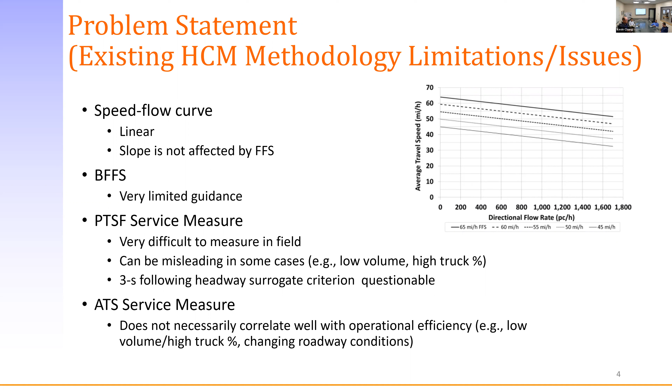The percent time spent following service measure is very difficult to measure in the field and can be misleading in some cases, depending on the combination of volumes and truck percentages. The 3-second following headway criterion was certainly debatable, so we wanted to revisit that topic as well. There's also an average travel speed service measure that didn't always correlate well with operational efficiency, again depending on the combination of volumes and truck percentages.

Truck impacts. One thing to look at here is this figure. Those familiar with the Highway Capacity Manual are familiar with the concept of passenger car equivalents - essentially that's how we deal with trucks, converting them to some equivalent number of passenger cars. What that's doing is inflating our analysis flow rate, and we just have this single speed flow relationship, so that pushes you further out to the right.

The challenge with 2-lane highways is you get more variability in geometry, horizontal curves, vertical curves. Just pushing you further out to the right does not necessarily reflect the speed degradation you'd have for these large trucks and consequently passenger cars that queue up behind them. There were other challenges because the PCE calculation depended on the service measure you were using, and there was an iterative component to it. So it was difficult to work with, and again didn't always reflect the actual speed reduction you'd have on 2-lane highways.

There were some issues with the passing lane calculations overestimating how much they improved performance on the 2-lane highway. There was a percent no passing zone input that was a little awkward because it didn't account for how that percentage was spread out along a certain length of highway - whether 50% is the first half, or broken up into several segments.

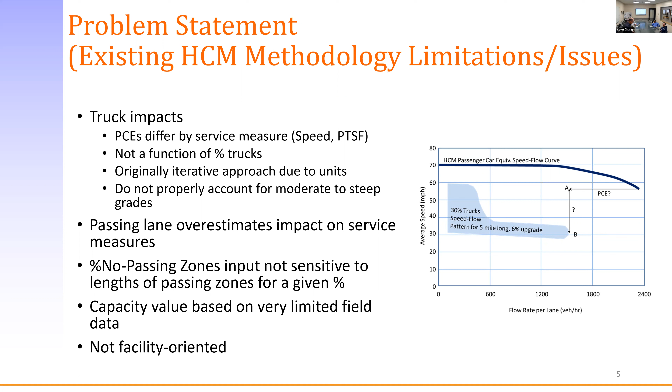In terms of ease of use, there were some things that were undesirable for users. We had 3 different classifications and different service measures being used depending on that classification. If you were looking at a class 1 facility, you had to go through calculations for both the travel speed service measure and the percent time spent following. Those of us who've taught this in the classroom - this drove students nuts. You get 2 different analysis flow rates, and why do I have to have 2 different flow rates?

So this was always awkward. It's one thing if you're using the software, but if you're teaching this, which you should be at least initially to the students, it was very awkward. And then there were several lookup tables with factors, some 2-way interpolations, some 3-way interpolations. It's amazing - as much calculus as our students take, I think the 3-way linear interpolation tables they found more challenging than calculus.

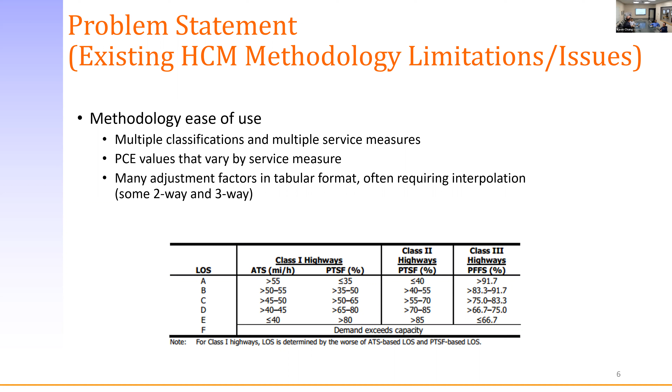So the objective of this research was to revisit performance measures, potentially revise the service measure - that is the performance measure we're using for level of service - and potentially overhaul the complete analysis methodology. Also to look at newer modern simulation tools that could help us with the research and potentially check some of the things that come out of it, and ultimately develop a new chapter for the HCM, which has been done, and I'll touch upon that a bit later too.

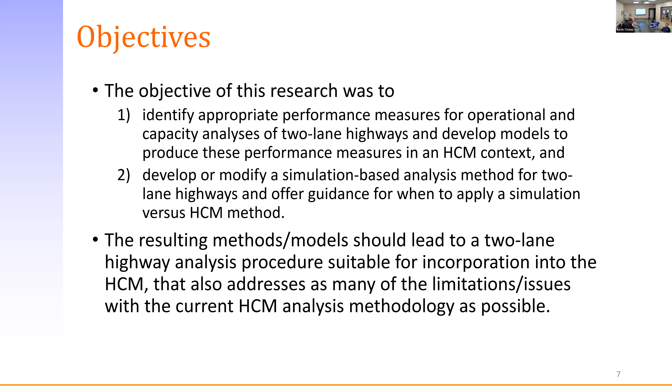Just to touch briefly on this, we had some field data, and some state DOTs that were very generous and helped us, because anybody who's worked on these NCHRP projects knows that even though there's several hundred thousand dollars of budget, they're always underfunded, so you're always looking for help in some form. We had state DOTs contribute field data - Oregon, Montana, so we had good presence from the Pacific Northwest, Idaho, North Carolina out east, and California. We had one site particularly selected because it had very high flow rates - we were trying to look at potential capacity level flow rates with that site.

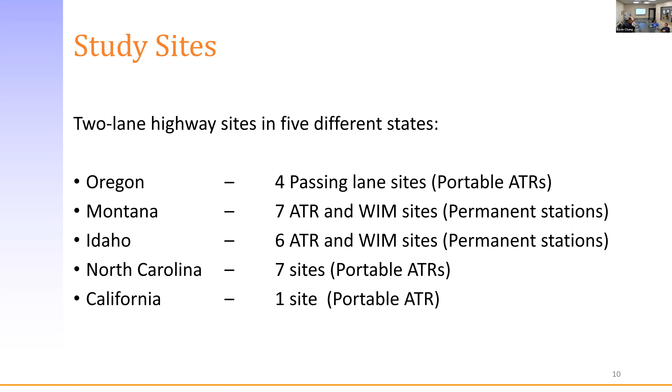And these were the locations. We'll just kind of skip through that.

Had a large volume of data, and to help us with that, we worked on a software tool to process the data to help us identify speed flow relationships, vehicle speed distributions, and any number of different things we were looking at. If anybody's interested in a software tool, they can contact me. Basically, it reads in different formats for point detection, whether it's loop detectors or pneumatic tubes or something like that. And we can always adjust it if you have a particular format. Anyway, this was very helpful in making our data processing and analysis more efficient.

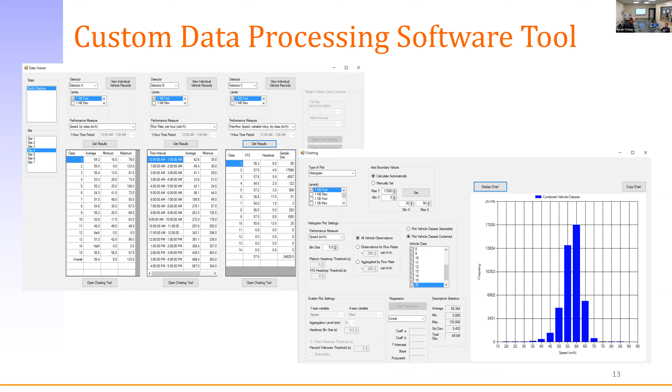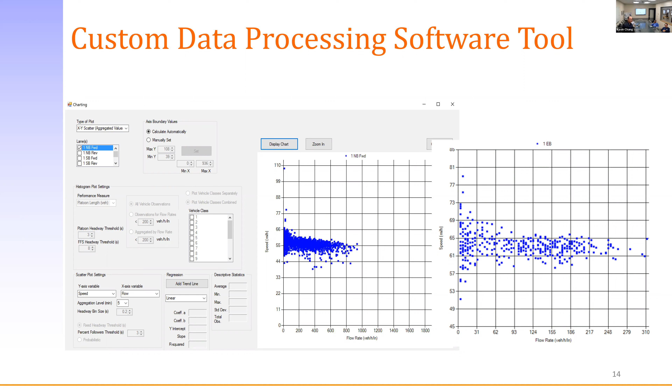Just briefly talk about simulation. Again, there really wasn't much available for two-lane highway simulation. I had worked on a project where we implemented this into CORSIM, a simulation tool some of you may be familiar with. That carried over into another simulation tool that I started developing about 10 or 11 years ago, because I was running into some limitations with CORSIM due to an older software architecture. So I decided to write my own. I took all that two-lane highway simulation logic from CORSIM and implemented it into what I'm currently calling SwashSim, and also made some upgrades at the same time.

So we use that tool for all the things - we did get a lot of field data, but unfortunately there's so much variety with the different scenarios we wanted to look at for two-lane highways, you just can't get it all without maybe a multi-million-dollar budget for field data. So we had to supplement that with simulation. We did do calibration with the tool using the field data we collected, and we relied on this largely for the simulation.

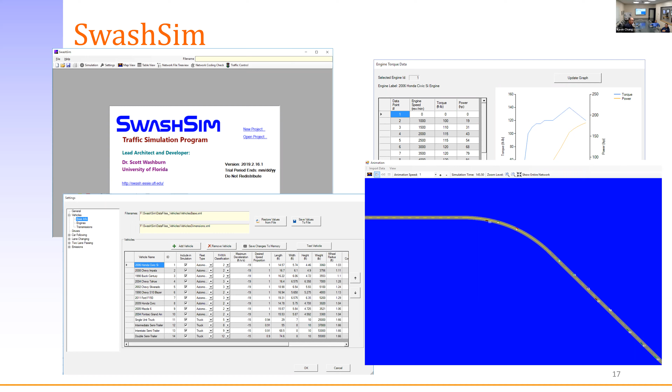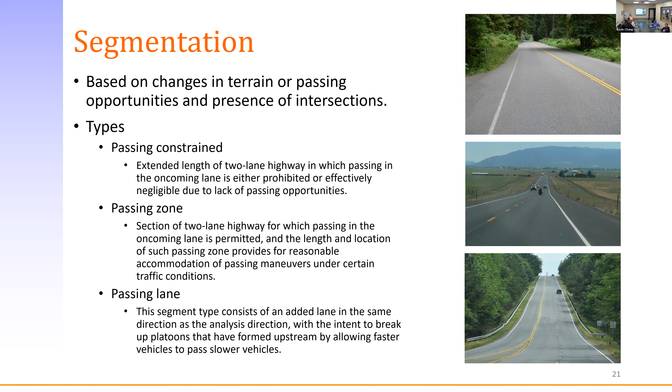So let me give you an overview of the analysis methodologies, the concepts behind the analysis methodology. We have three different segment types now. We've got the passing constrained segment, where you've got solid yellow lines, you can't pass in the oncoming lane, just a two-lane cross section. Passing zone, where you've got the dashed yellow line and you can pass in the oncoming lane. Or a passing lane, just a short section of additional lane to accommodate breaking up platoons due to slow moving vehicles. So we no longer have the percent no-passing zones input, because you would set this up explicitly as this segment has passing or does not have passing and so on. It explicitly accounts for the length of passing zones, and you can now string together a series of contiguous segments and essentially make a facility level analysis.

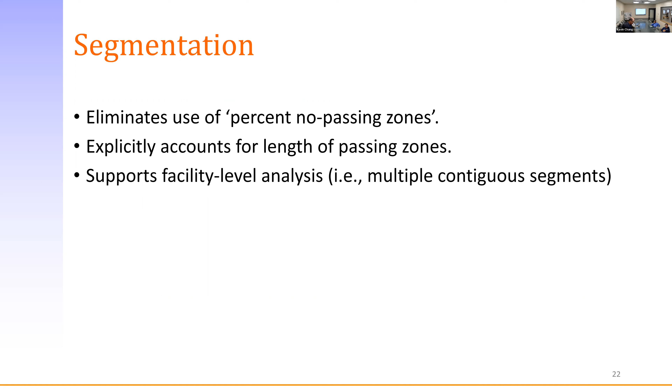Treatment of trucks - this is an area where we're deviating a little bit from the Highway Capacity Manual, at least historically. We had quite a bit of discussion within the committee, but we got buy-in from the committee. We don't use the PCE - there's no passenger car equivalent concept here. It's explicitly using percentage of trucks. What we did was look at three different classes of trucks: the single unit truck, the class 8, and the class 9. The class 8 and 9 are essentially tractor trailers, whether it's a day cab or a long haul cab.

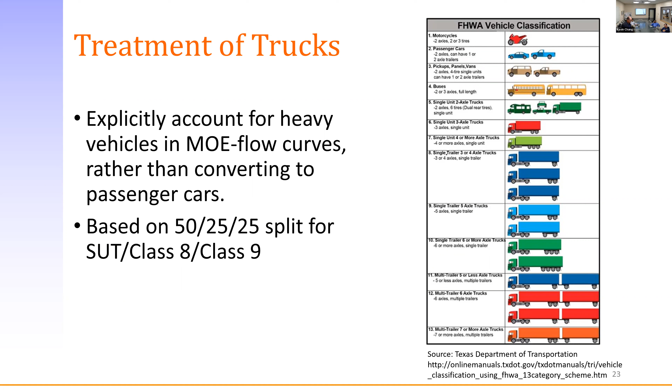And for terrain, we now have five different classifications. So depending on the length of the grade and the percentage of the grade, upgrade or downgrade, you would classify it as 1 through 5. So 1 essentially has not much impact to truck speeds. 5 is very significant - they're probably going to be at crawl speed going up grades, or crawl speed potentially going down grades because they're trying to avoid the runaway truck phenomenon.

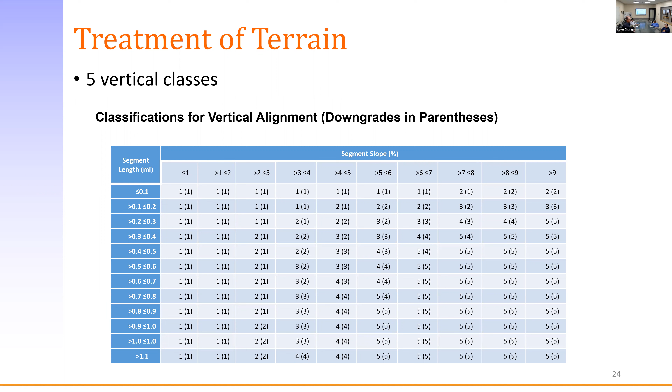And we're also accommodating some horizontal curvature, which we did not have as part of the previous analysis methodology. So again, there's 5 different classifications for horizontal terrain based on the radius of curvature and the super elevation.

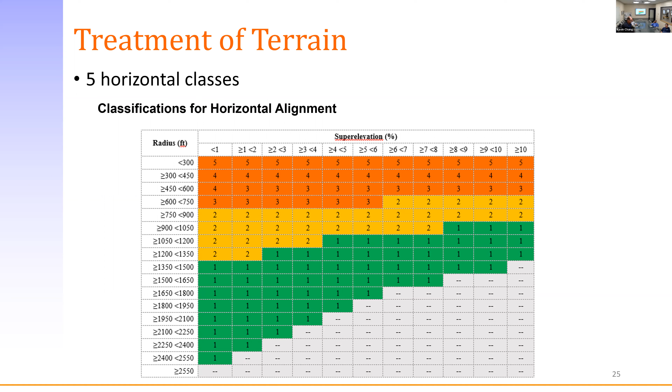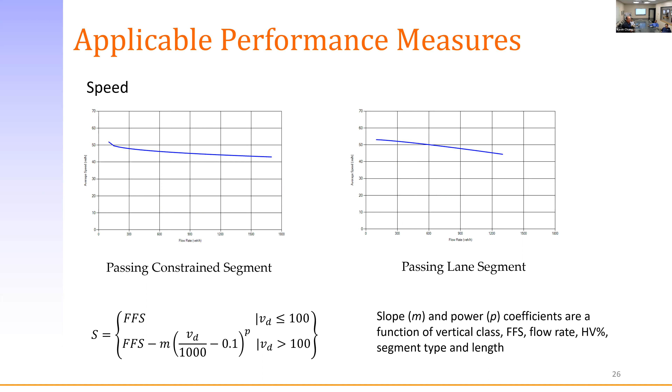There's a lot more background. That additional process we went through is not reflected in the chapter in the HCM, but if you're interested, you can get the original research report, which talks about the different things we looked at in trying to identify the follower status. But in the end, we went with this 2.5 second headway, which gets us in the ballpark most of the time.

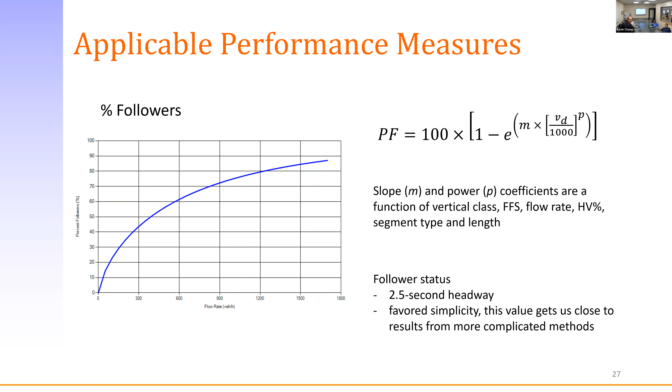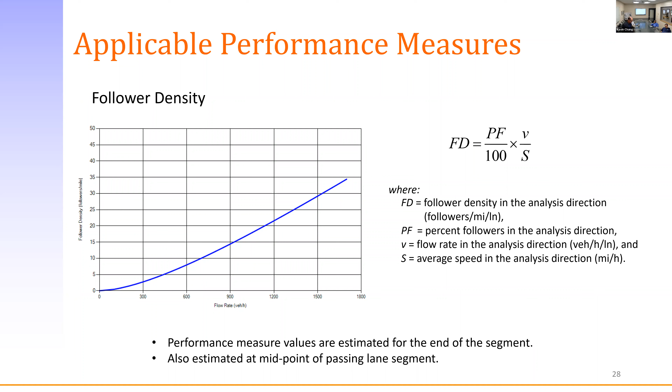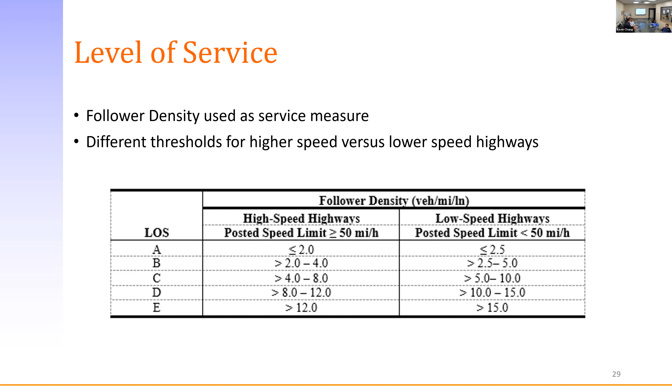Capacity: we did have difficulty finding sites with high flow rates, and this has always been a challenge. Agencies have a tendency to upgrade to a multi-lane cross section when the volume to capacity ratio is still not that high, just because people perceive conditions to be quite poor even at moderate levels of demand to capacity. So it's hard to find a 2-lane highway still out there operating with very high flow rates. We had a couple sites, one in California and one in North Carolina, and they were in the same ballpark as what the HCM currently has, 1700 to 1800 passenger cars per hour. We did not have enough additional evidence to change that, so we left it as is.

We did look at passing lanes. This was largely a simulation exercise, and you can have a reduction in capacity, at least via simulation. In conversations with some folks in Europe, where these 2+1 installations are common, when you have a passing lane that drops back down to a single lane under high flow rates, you can get quite a bit of turbulence at that merge point, which can lead to a reduction in capacity. We were hearing from folks in Europe that sometimes they have these giant festivals, and where they have the 2+1 or passing lane, they'll actually close the additional lane because they found that becomes more problematic under high flow rates. So we do have some reductions depending on the percentage of heavy vehicles and the vertical classification to capacity for passing lane configuration.

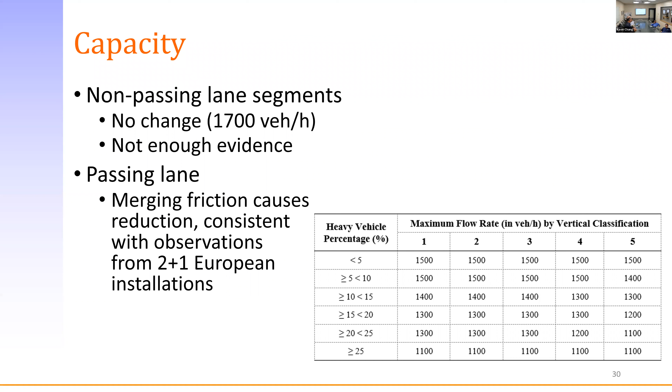So real quickly, the steps that you go through. Actually, I think I'm going to skip through this, so if you're interested later, you can slow down the video and look at it. But again, these are all outlined in the HCM chapter as well. As we have with every HCM methodology, we outline the sequence of steps you go through to do the analysis.

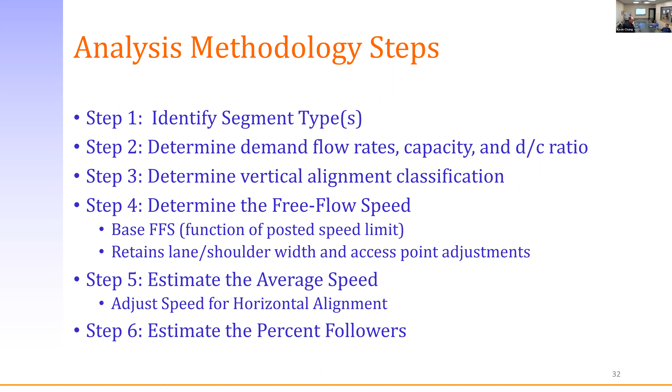And this was what I was mentioning before, the 2+1. So this is a continuous 3-lane cross section where you just get an alternation of the passing lanes. The passing lane is always on the inside in the middle, and it just continuously changes direction. So you typically have like a 2-kilometer length of passing lane, and then you have a little clearance zone, so you try and avoid accidents in between. And in these installations, you do not allow passing the oncoming lane.

This type of configuration agencies really started to turn to because of safety issues of passing the oncoming lane. So sometimes they are barrier separated, sometimes they're not. We found different countries felt differently about that. Like barriers generally aren't friendly to vehicles, but particularly motorcyclists. So some countries were more sensitive to that than others.

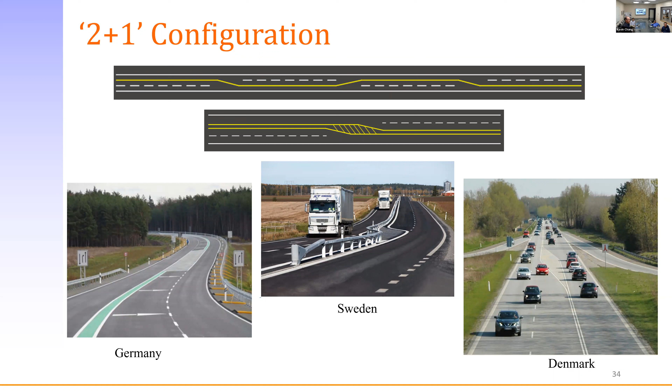We've never had anything before in the HCM about these 2+1 configurations. So it's not comprehensive yet, but we have a small section about 2+1. US transportation agencies are kind of interested in exploring this, and it gives them a starting point. There's a couple of calculations in there to look at how that type of configuration may improve performance over a typical 2-lane cross section.

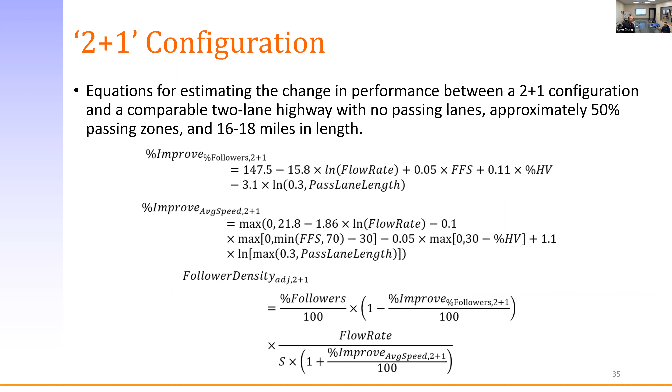So real quickly, a summary of this. We did offer a little bit more guidance on base free flow speed. It's simply now a function of the posted speed limit. Unfortunately, with all the field sites we had, I think they were all posted 55, or maybe all but one. In the future, we'd like to get more data from sites with more variety in the posted speed limit. So right now, the base free flow speed is just 14% higher than that posted speed limit. But again, when we did the data analysis, it was originally all relative to just 55 miles an hour. We feel that the new speed flow relationship is more realistic with the current field data that we saw.

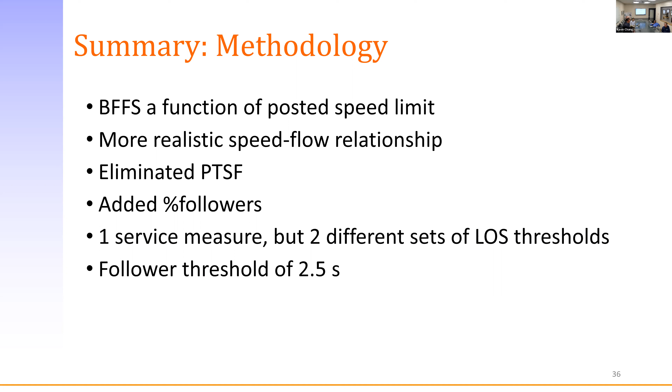We eliminated the percent time spent following measure and added a percent followers measure. Now we just have a single service measure, but there's 2 different sets of LOS thresholds, and the follower threshold, which previously was 3 seconds, is now 2.5. Again, no PCEs, everything's done in units of vehicles per hour, so there's no conversion to passenger cars per hour.

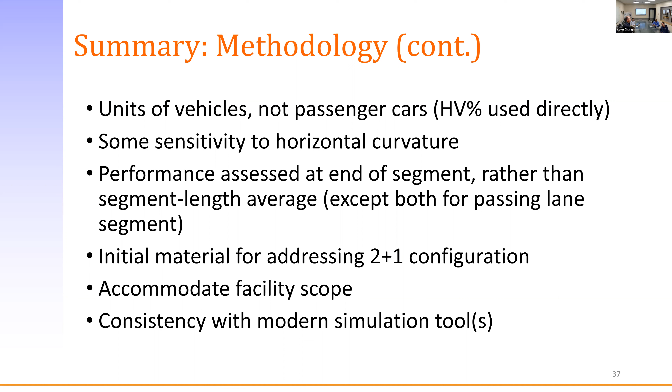There's some sensitivity now to horizontal curvature. Another thing is, with the previous methodology, essentially those calculations were on a link basis or segment basis. Now, those calculations are specific to the endpoint of the segment. So if an agency wanted to check the calculation from the HCM, they could go out in the field, if they have loop detectors, great, or put down some pneumatic tubes, get some point measures and compare that to the estimates from this methodology. Again, we've got some initial material for the 2+1 configuration. We can accommodate the facility level analysis, and these results are consistent now with what we're seeing from modern simulation tools.

On the ease of use, this was something we were trying to consider in this project, just to make this methodology a little bit easier to use. There are no tables that require interpolation. There are quite a few lookup tables, but those are specific usually to, say, vertical class. Once you've identified is it 1, 2, 3, 4, or 5, you just get all your coefficients for the equations from that table - there's no interpolation involved. Again, not having to deal with converting from vehicles per hour to passenger cars per hour, single service measure, no percent no-passing zones input, and eliminating the PTSF measure, which is very difficult, if not impossible, to measure in the field.

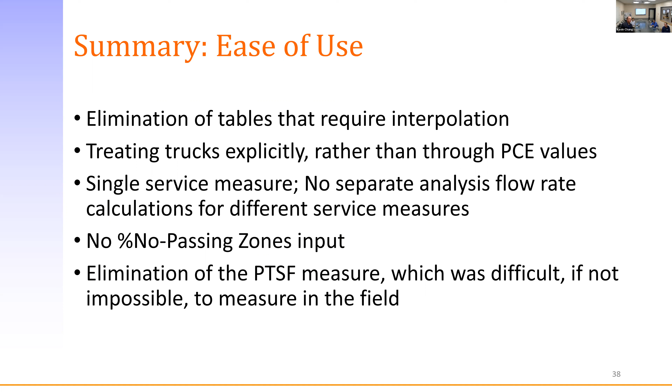Again, there's SwashSim, there's Transmodeler, which should give you pretty good results - we think realistic results matching what you would observe in the field for simulation. And I think now there's some other tools, the VISSIMs, the Aimsuns, and so on. I noticed that the paper I did with a student about implementing the 2-lane highway simulation modeling into CORSIM has become extremely popular in the last couple of years. So I think it may be some of these other simulation tool vendors that are looking at that, and I suspect there's some similarity now in how 2-lane highways are simulated in those tools with how they are in SwashSim.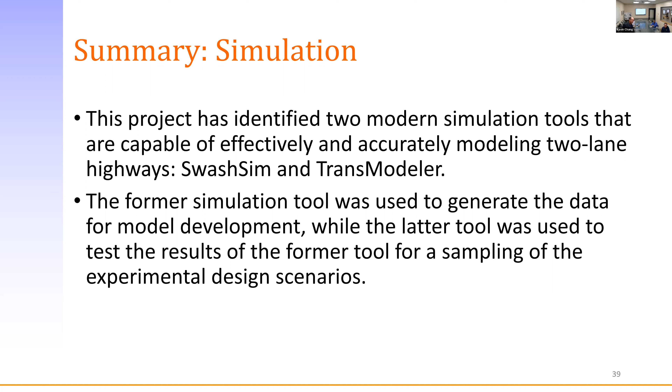So the chapter was formally adopted by the Highway Capacity and Quality of Service Committee at the January 2019 meeting in Washington, D.C., the TRB meeting. Then an electronic version of the chapter was released on hcmvolume4.org, basically a year later. And now it's included in the print, although I'm not entirely sure if the print edition has hit the streets.

But there is an electronic version now of the HCM 7th edition, which was released earlier this year, so you can get the new analysis methodology. I'm not actually sure if the pre-release version is still on the HCM Volume 4. It might be, but certainly you can get the full official final release version now in the 7th edition of the HCM.

And that analysis methodology is included in software that I make available freely called HCM Calc. More information about it is on this GitHub site. So if you want to experiment with that, send me an email and I'll send you the software.

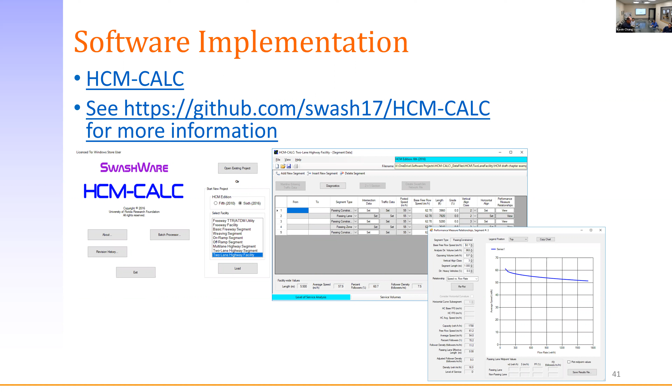All right, so let me just give you a little bit of an overview now of the current project we have going on, this NCHRP 08-135, called Reliability and Quality of Service Evaluation Methods for Rural Highways.

And this is our research team here. Again, I'm the principal investigator. Dr. Al-Kaisy from Montana State University is on the team. And then we have Kittelson Associates, Bastian Schroeder is leading that part of it, and Anna Moreno, who's with Technical University of Munich in a postdoctoral research position.

This project is now taking what we've done before and trying to take it to the next level. The previous project was focused exclusively on 2-lane highways. Now what we're trying to do is expand that to highways, but a little more specifically rural highways. In the HCM, we've got a facility methodology for freeways, arterials, and two-lane highways now, but we don't have a way to connect multi-lane highways to two-lane highways to the occasional intersection, signalized, roundabout, or stop control. So this project is trying to develop that rural highway facility methodology.

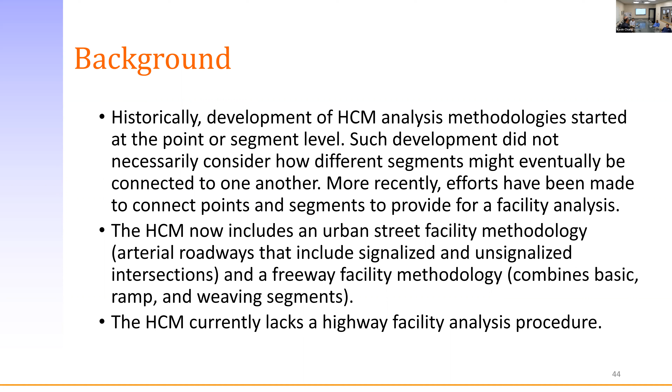The challenge, let me see, I might have that on a future slide, so let me come back to the reliability component in just a moment. But yeah, there are some different challenges here with rural highways versus freeways versus arterial streets. One, much longer distances we're usually looking at, more variability in the geometry, horizontal and vertical alignment, and some variability in these different cross sections. Whereas there's quite a bit of similarity in a freeway facility from one segment to the next—it's really more, does it have an on-ramp, does it have an off-ramp. And even with arterials, there's quite a bit of consistency in the cross section along the length of the arterial.

The rural highways often serve quite a significant percentage of recreational traffic, particularly on weekends. They even serve some bicycle traffic.

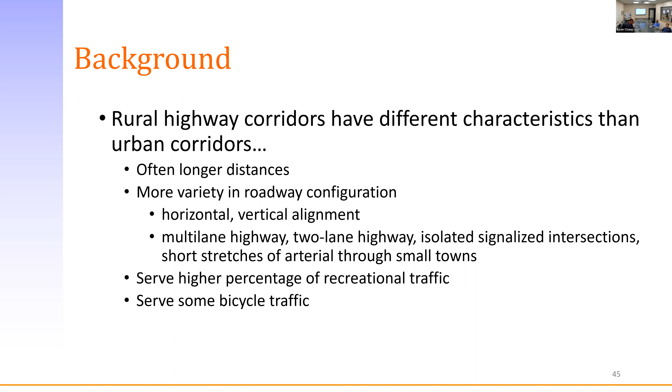So the objectives of this project: develop guidance for segmenting a facility. Again, how do we identify this is multi-lane, this is two-lane, this is an intersection, and so on, but a little bit more than that, I'll touch on in a second. Develop a level of service methodology for automobiles. Develop a reliability analysis methodology for automobiles. Develop a guidebook for the users, and identify research and analysis needs for the bicycle mode on rural highways.

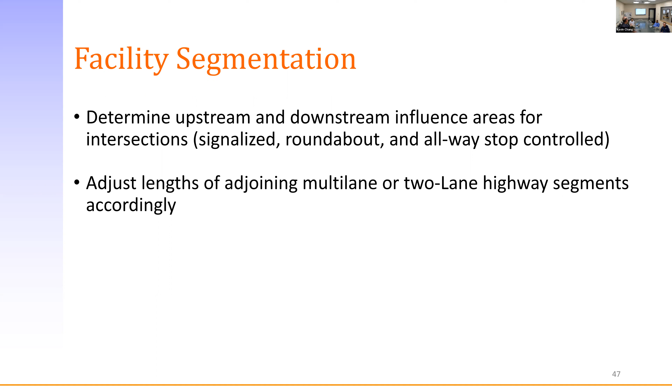So the segmentation, some of it is probably pretty straightforward—we're going from 4 lanes to 2 lanes, okay, got a multi-lane, we've got a 2-lane. It gets a little bit more complicated where you have intersections, because intersections are often just considered as points, but they're not just points. They certainly have an effect on operations a little bit upstream, a little bit downstream. So we're trying to identify what are those influence areas, and how signal timing and the traffic characteristics and so on affect how much influence that intersection has upstream and downstream. And then you would adjust the lengths of those adjoining segments accordingly.

The guidance on when you analyze, say, a stretch of arterial roadway with the urban street analysis methodology in the HCM is somewhat generalized. We're looking to try and make that a little bit more comprehensive—when would you use that urban streets methodology versus, say, just using an isolated signalized intersection analysis methodology combined with an upstream 2-lane segment or multi-lane segment downstream? And with that, we're trying to look at a number of factors: signal coordination might play into that, possibly demand volumes, driveway presence, roadside activity like parallel parking, things like that. So we're just trying to develop a little more comprehensive guidance, because we have heard from agencies that they would like better guidance on when they should be using the urban streets methodology.

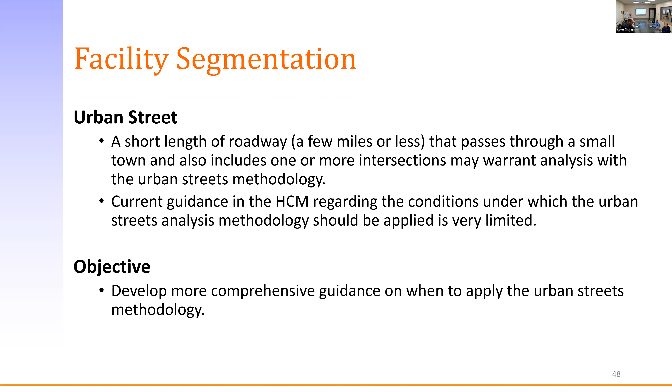And that, again, would be applicable when you're going through rural highways, you go through these small towns and might get a series of intersections that would operate more like an arterial street.

So when we think about freeways, the service measure is density, whether it's a basic segment, an on-ramp, off-ramp segment, or weaving segment—it's the same service measure throughout. Likewise, with an arterial, delay is the service measure.

Here, it's a little more complicated. For 2-lane highways, we're using follower density. Multi-lane highways use density. Intersections use delay. So how do we come up with an overall facility level of service methodology with somewhat disparate service measures? That's something we're needing to figure out.

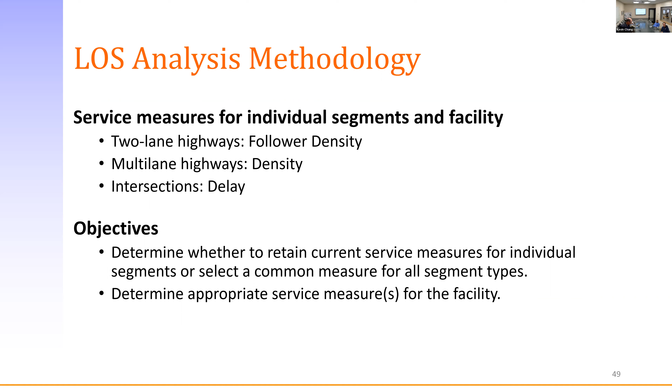On the reliability aspect, there's been a lot of back and forth on this with the panel. The way it's been treated in the HCM is we want to look at usually a year-long duration of traffic demands and weather events and incident events, possibly even construction zone information, and develop a distribution ultimately of travel time. These kinds of data are a little harder to come by for rural facilities right now.

Usually the demand volume data collection points are much more sparse than an urban freeway situation. Weather data collection may also be more sparse in these rural areas. For incident data collection, there are traffic management centers to track incidents on urban corridors, but they don't see rural incidents directly—people call in and report it, but a lot of incidents on rural routes go unreported.

So we're probably not going to end up with something that looks like the travel time reliability analysis methodology we have right now for freeways and arterials.

What we're trying to do right now is look at how we can use existing probe vehicle data, such as INRIX data, HERE data, something like that, to at least help identify hotspots spatially and temporally—is there a certain section of this highway that appears problematic, or a certain time of year, like everybody traveling up to the ski resort or something like that.

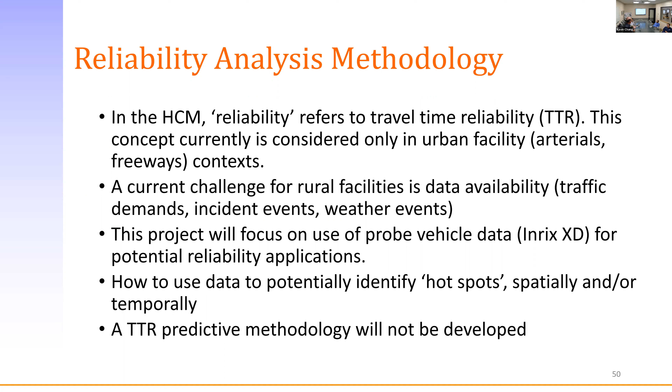But we're also going to try and lay out where we need to go in the future to try and get to that. So hopefully some useful guidance for future projects when the data do become available, to develop a travel time reliability analysis methodology that may be more similar to what you see now for freeways and arterials.

And we're putting together computational engines. This is being built within HCM Calc, where you can have this series of segments—multi-lane highway, 2-lane highway, different intersection types, and so on. This will be available when the project is over.

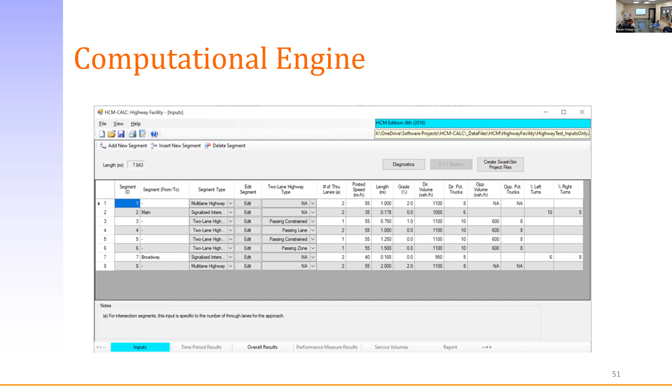And again, we're developing a guidebook. So we're going to have several example problems and show a step-by-step process for how you go about analyzing that, to help people when they want to do their rural highway analysis.

And we're planning to do it in a little more dynamic format, hosting it on GitHub. Certainly it could be printed to PDF, but the hope is this will be easier to update, and people can easily go in and identify, oh, you've got a typo here, or the wording's awkward here—but a lot easier to maintain and update ultimately.

And there's a bicycle component to this, so we're not going to be developing a bicycle level of service methodology. There is a current one, but it's recognized it does have quite a few limitations. Agencies are looking at some other analysis methodologies that are out there for bicycles.

So we're trying to figure out from both practitioners and avid cyclists on rural highways, where do we need to go? Where do we need more research? Where do we have gaps and limitations in the existing HCM analysis methodology? And identify that again for a future project.